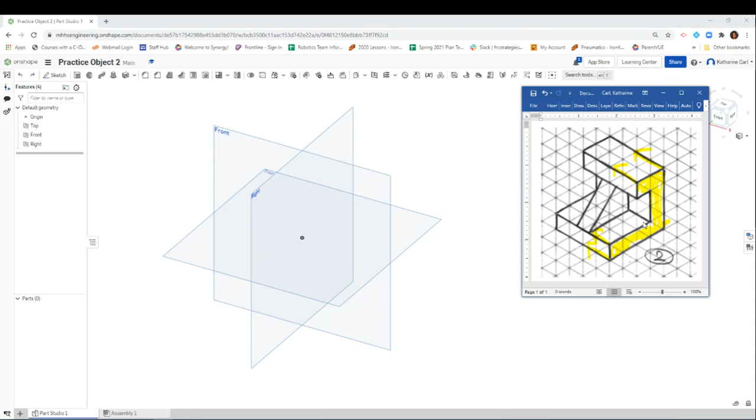Before I get started, I also want to recognize that this side highlighted in yellow is on the right side. So I'm going to be starting a sketch on this right side plane. I don't like drawing when there's all these planes, so I'm going to go ahead and hide the other plane so I can only see this right plane. Then I'm going to view that right plane straight on.

I'm going to move it over a little bit and bring back my video so I can draw and estimate the values out. I'm going to grab a pen really quick, and I am going to measure out this bottom horizontal line.

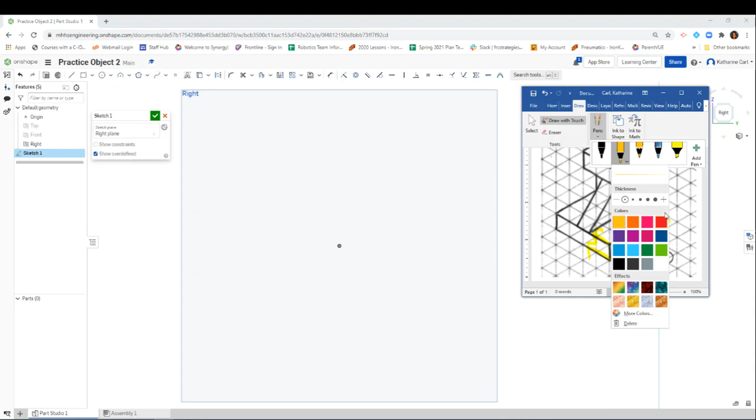It goes 1, 2, 3, and 4 across horizontally. I'm going to have this point right here, that's going to be my origin. So I'm going to go 4 to the left, 1 up, and then 3 back.

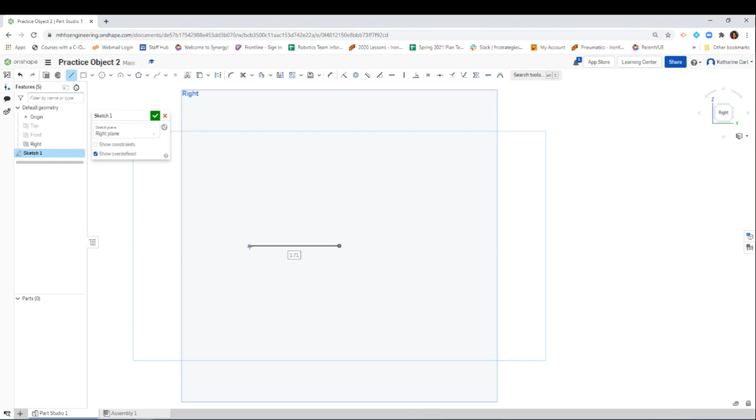So here we go, start at my origin, go horizontally. It doesn't look like 4, but you see how that box popped up? So I can just type in 4 and hit enter. Now from there I can go up, click once. There's a box around the dimension, so I'll click 1, hit enter.

Now I'm going to continue, and I wanted this to go about 3. There you go, as close as I can, and then I'll literally type 3 and hit enter, and there's the distance of 3.

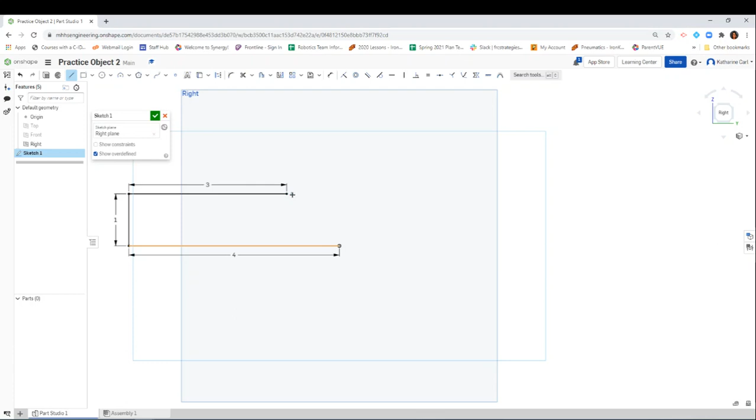Now I don't remember how far I need to go up, so I'll go back to my drawing. Let's check it out. It goes up 1, 2, over 1, up 1 again, okay? So that means I'm going to go up 2, type in 2, hit enter.

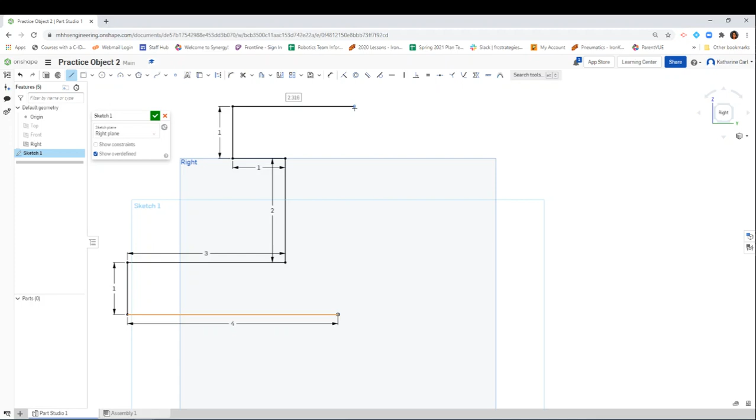Now I'm going to bring this view down a little bit. I'm going to go to the left about 1, type in 1, then go up 1 again, click to make the line stay, type in 1, hit enter, and then it went back this way about 2, click that, type in 2.

And now I should be able to connect this directly. Awesome, and that was a distance of 4. Let's double check on our drawing. Yep, it goes down 1, 2, 3, and 4, okay.

And if you notice, on Onshape it's now shaded, and that means it is completely closed. What's awesome is the whole thing is correct, meaning the dimensions are correct, and we did it along the way. So these are the shortcuts that you'll start to find out.

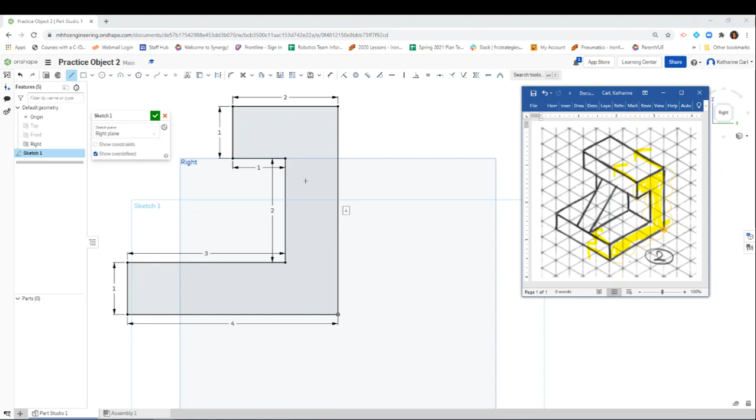All right, so now I'm done with that sketch. Now I also want to change it so I can see the isometric view so I can see the extrusion. And now I would like to extrude this shape.

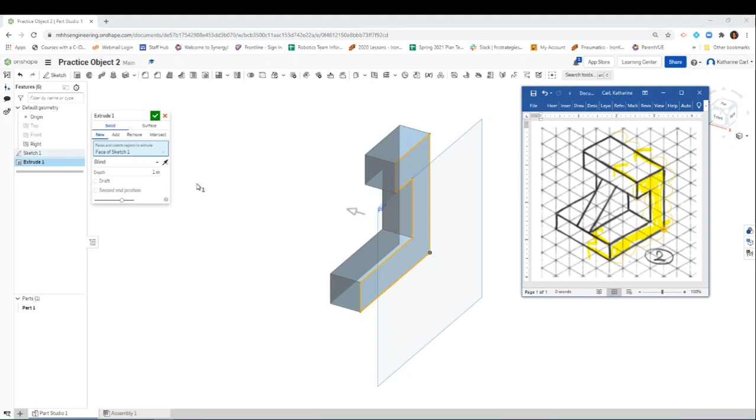I'm not going to go this way. I'm going to reverse the direction. And now I need to figure out how far. Remember, each grid we're using is 1 inch, so it's going to go back 1, 2, 3, and 4. I'm going to go back 4 inches, hit enter, and that looks about right, and the green check.

Now I'm going to hide this right view, and if you notice, that's getting pretty close. The last thing we need to add is that little rib in the middle. We could use this, but I'm going to show you another way right now.

What we need to do is add a plane that's in the middle. Because if I look at my drawing, move this view over, you can tell that this piece in the middle goes over 1, 2, 3, 4, and I'm even going to use a different color so you can see it better. Here's the middle point, right? It goes about a half a length this way and a half a length this way, but it's in the middle. So what I need to do is create a plane that's in the middle here in order to draw this feature.

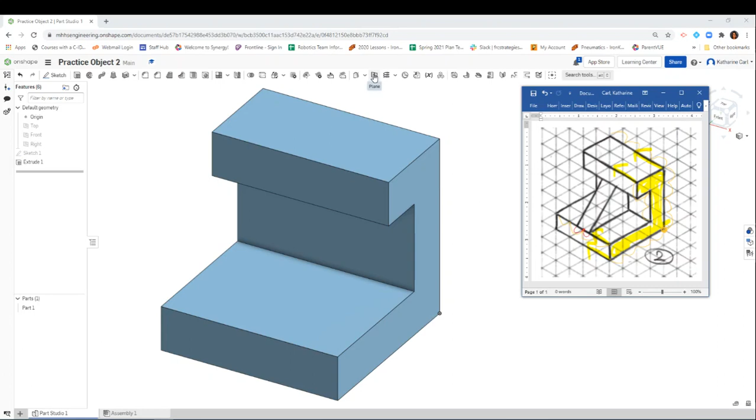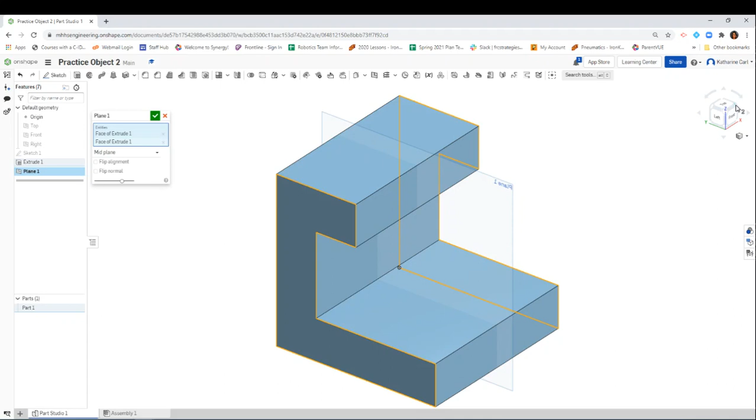So I'm going to use this tool right here, planes. I'm going to click on it, and if you notice, there's all these entities. You could use an offset, but we're not going to use an offset. I'm going to use a mid plane, and what that means is I need a mid plane in between this plane—I'm going to rotate it—and this plane. And if you notice what pops up, this plane is directly in the middle. Awesome, check, that's what I wanted.

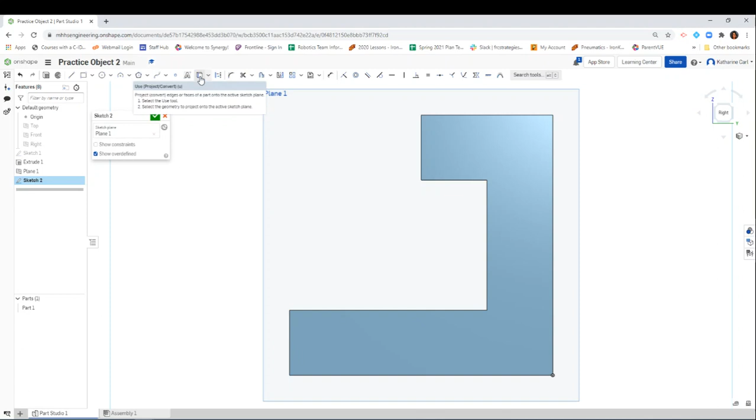And now I can create a sketch and click on this new plane I created, and now I can draw things directly on that plane. So I'm going to go to this right side view, and now I'd like to actually project and use a side. You see this tool right here, this is also a new tool called Use or Project Convert. I'm going to use this because I want to project this side, and also this side, onto that plane.

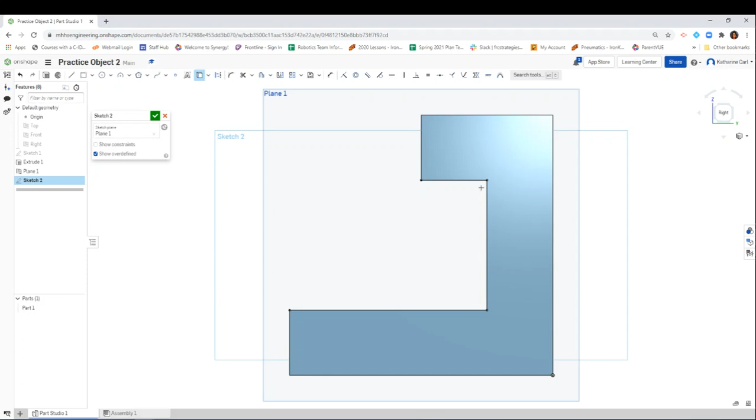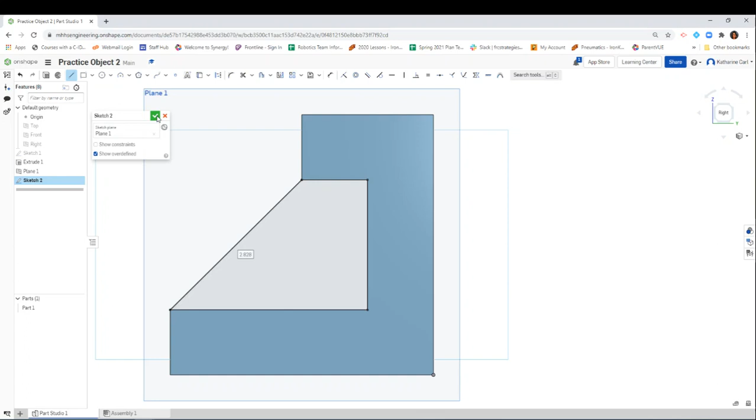And if you notice, if I rotate it to see, now you can see these dark lines. It created those lines for me so that I don't have to redraw them. So click here. Now all I need to do is connect these 2 points, because if I look at my drawing, it just connects directly from this top edge down here. So I'm going to click on this line, click on that endpoint, and click on this endpoint, and it's shaded—that means it's a closed shape, so we can actually extrude after this. But before I do, I have to finish the sketch by clicking on that green check mark.

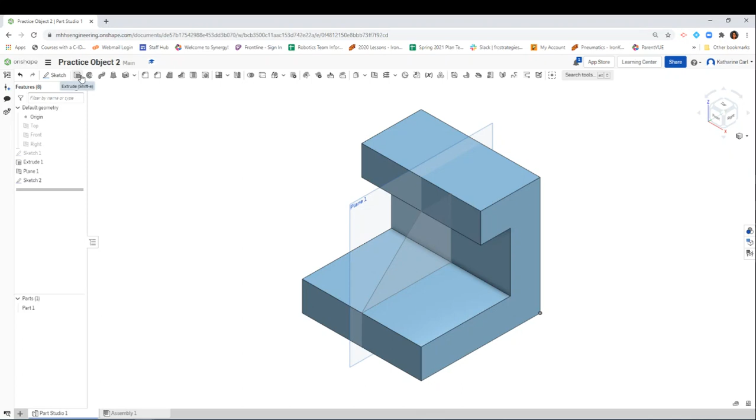I'm going to make sure to click on this isometric view here. If yours is all twisted around, know that you can also go here and click on that isometric view, and it will give you that orientation. So now I can click extrude, click on this shape, and if you notice, it's all going to one side, but we want it in the middle, right? This plane we created was in the middle. Don't worry, you can click here—we don't want blind, but we want a symmetrical extrude. And right now the whole symmetrical extrude is a distance of 1.

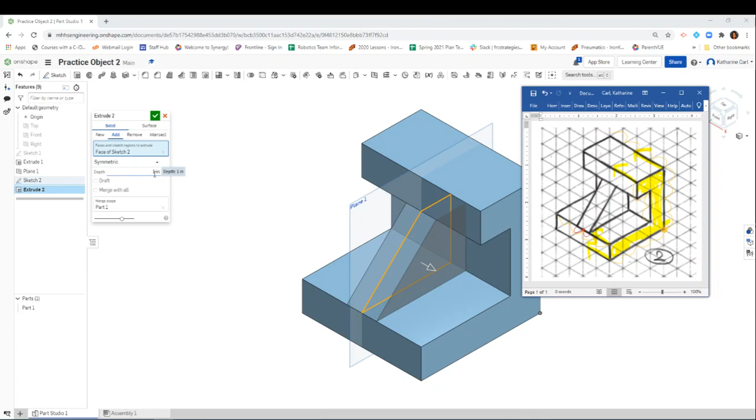Let's check out our drawing. If you notice, it was half this way and half a distance that way—a half plus a half is 1. So that 1 right in there is correct, and we can go ahead and click OK. And there is our new shape. I'm going to hide this plane, and there is our isometric object. It looks pretty cool.

Next video is going to show us how to create a multi-view drawing with dimensions of this object.